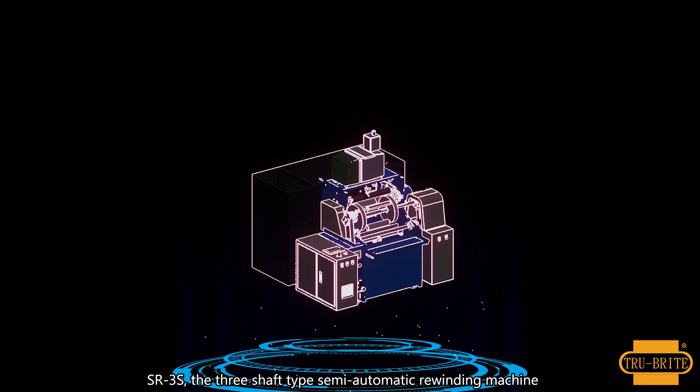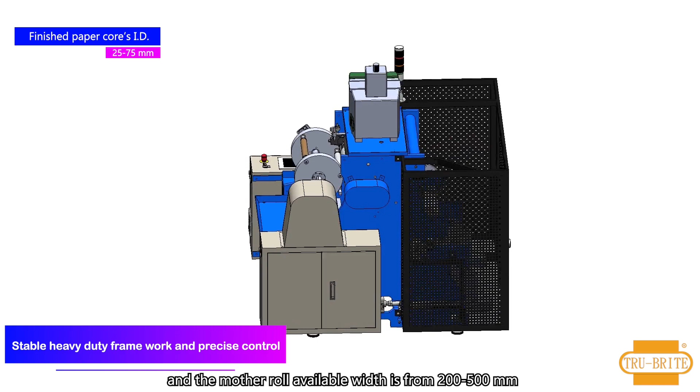SR-3S, the 3-shaft type semi-automatic rewinding machine. It's suitable for rewinding aluminum foil, PE, PVC cling film and stretch film. The stable heavy-duty framework makes it affordable for finished paper cores ID up to 25 to 75 millimeters, and the mother roll available width is from 200 to 500 millimeters.

Automatic tension control: the SR-3S rewinder automatically controls the tension at any time according to the data of the parent roll. It controls the brake strength precisely. Users can look over values of brake output and the weight of a single roll anytime.

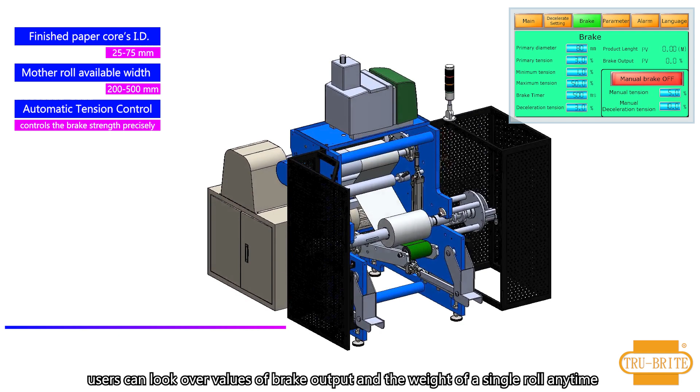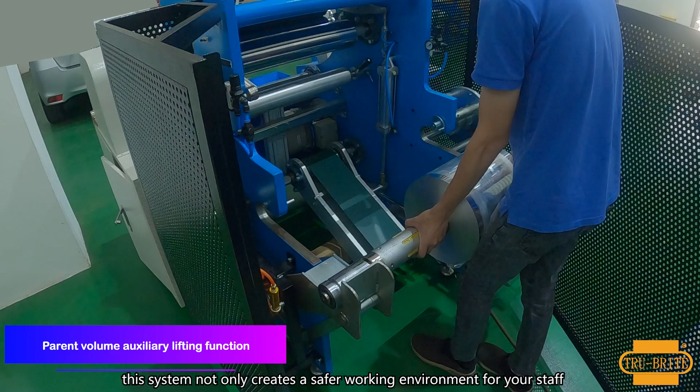This model is equipped with the parent roll lifting function, which can easily replace the new parent roll when loading and unloading the parent roll. This system not only creates a safer working environment for your staff but allows for the efficient introduction of raw materials into the manufacturing process.

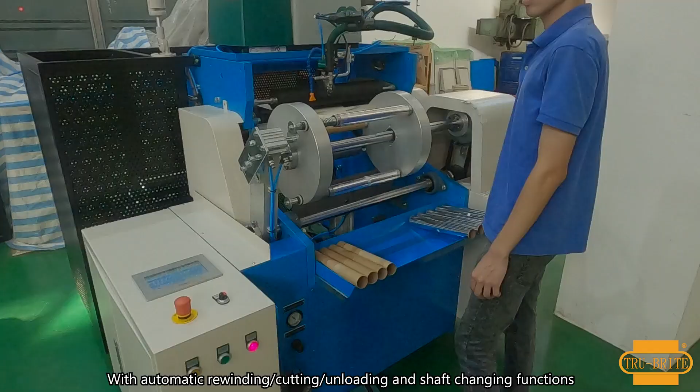With automatic rewinding, cutting, unloading and shaft changing functions, the user only needs to manually load and unload the material to complete the operation. A glue spraying function can also be added. The product will be automatically sprayed before rewinding and when rewinding is completed, making the rewinding process faster and safer.

The fixed feeding function can be selected, and the material will be automatically fed for a short period after cutting, which is convenient for users to paste the raw materials on the paper tube.